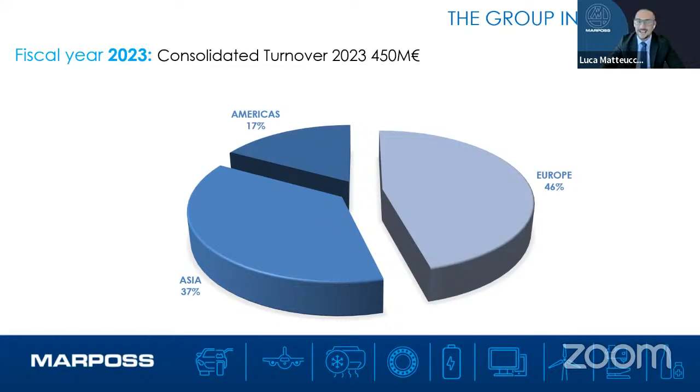Where we are based: our main sales and service centers are in Germany, China, USA, Japan, and Italy, while our main manufacturing plants are in Italy, China, Germany, US, and France. We are also moving forward to establish a small manufacturing facility here in India, due to the fact that India has become more and more relevant in the international manufacturing landscape, so we really need to move forward with this decision soon.

Which are the markets that we are more or less into? Apart from our stronghold coming from machine tool makers and gauge and fixture market, we are pushing forward especially into additional markets, coming away a little bit from the standard automotive industry. We've got aerospace, and here in India it's become a very interesting market, as we saw in the last panel discussion.

Biomedical, glass industry, where we saw there's quite a good market share in Europe, and we're expecting the same will become true also over India. Energy sector, because I think this is especially relevant in our country here, where the sun definitely is not missing, so a lot could be achieved in energy that could come from fuel cell and other sources of energy.

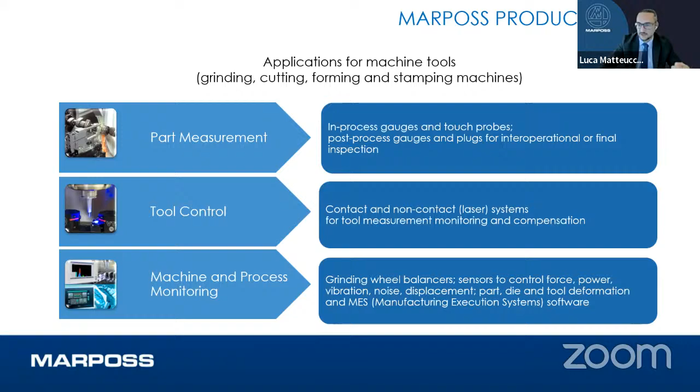Then, obviously, when we analyze the part related to inside the machine, we also offer the post-process, or the after-machining process section, where we could have inline gauging, offline gauging for some sample testing, inspection, testing with non-destructive test, leak test, and functional testing of, for example, batteries and motors. We also reach the point where we are able to provide completely automatic assembly solutions integrated inside the line of our customer.

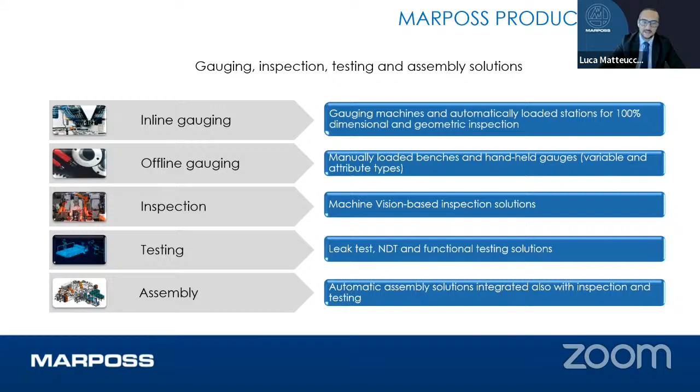How are we able to do this? We are able to do this thanks to our own technology, based on our gauging probes, our software, along with our industrial computer. The software collects all this information to give you the quality indication about how your process is going and what you have to do in order to correct it and maintain the current level.

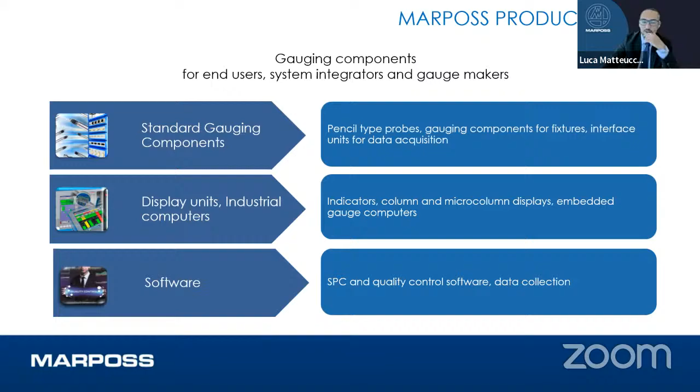Interesting technology that we're able to offer are also, as you say, contact gauging, but not only the electronic one, also air to electronic and also hard gauging. So it's very simple, but still very effective way to measure.

Non-contact gauge is a very interesting solution because it doesn't create any potential damage to any part, and also is very flexible. So in terms of avoiding overproduction and having an application that is able to measure various parts, we also move forward with this technology. Vision system, if you want to say, is more or less related to the above one, but in a different way.

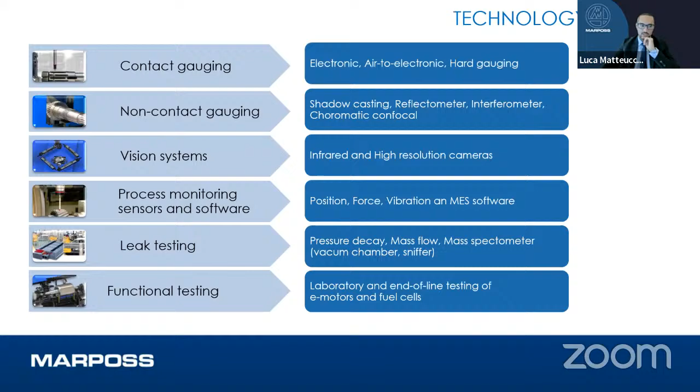As we said before, process monitoring, sensor and software, again, to check the entire environment for the machine, the leak testing and functionality test.

Having said that, what at the moment is our range? Our range is coming from, as you can see from this slide, 50% around machine tool products. Machine tool products means all the ecosystem related to the machining of the part. Following that, the other big chunk is inspection and testing, around 37%, and the remaining part, which we just saw in the previous slide, is the gauging component.

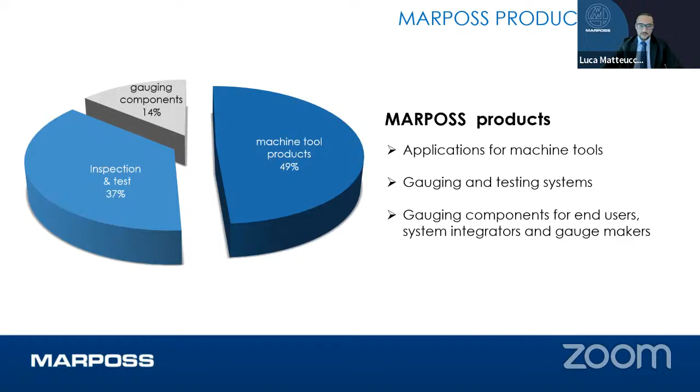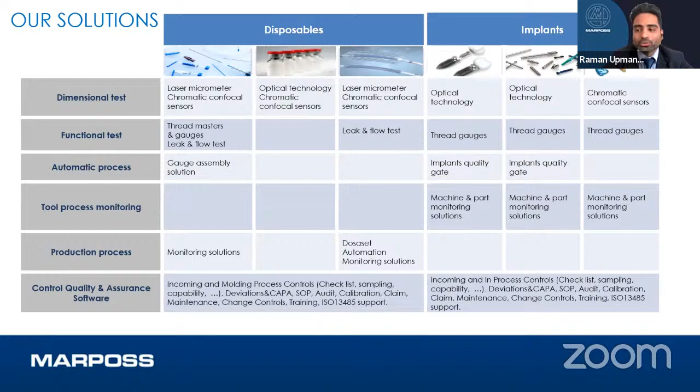For tool monitoring, as Luca explained, before the tool wears out, we need to continuously monitor the health of the tool which we are using to make any of the implants. So for that, we can provide the sensors. For production process also, we can provide the automatic dispensing solution, which can dispense automatically, you can say, the cyclohexanone to bond something. Apart from that, we do have the Industry 4.0 software also to link all these. I'll move on to the implants now.

So for implants, the first solution which we have is the optical solution, that is the OptoFlash XS. It does the complete measurement of the orthopedic screws and even the dental implants. It can measure threads, pitch diameter, size, profile angle, thread total length, linearity, and concentricity. It will recreate the 3D of the complete system, and this is based on the shadow casting process. Then you can have any of the measurements by the use of our software, and the cameras use the shadow casting process.

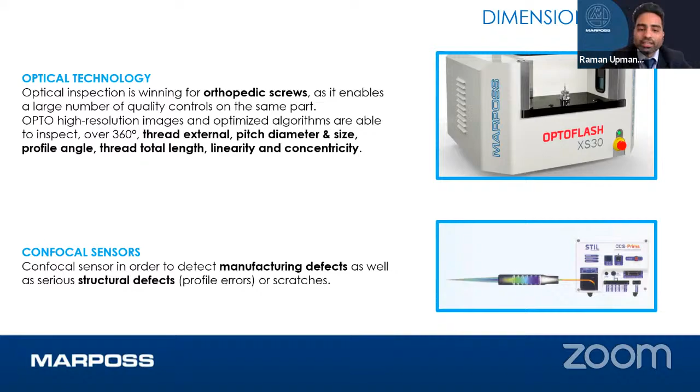Next one is the confocal sensors. Confocal sensors are again used to detect the manufacturing defects. They are basically based on the confocal technology, that is the white light technology. Once the white light is emitted from our sensor and gets reflected or refracted back from the surface, then from the wavelength at which it gets reflected, with that calculation we can find the structural defects and manufacturing defects of the implants.

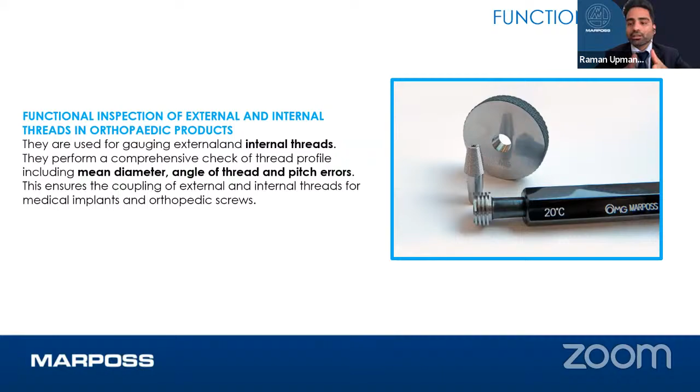Third one is functional and inspectional test of internal and external threads in orthopedic screws. These are the gauges which we provide to check the mean diameter, angle of the threads, and pitch errors. These gauges are not just a normal gauge. People will say, I can manufacture these gauges over here. Marposs provides the gauges with ISO certification, which is a must in the medical segment, because whatever dimension you are checking will ultimately go inside the human body. So 0.1, 0.2 mm here and there can make a lot of impact. So we provide these gauges to check the dimensions, and go/no-go gauges that are ISO certified.

Next, we also provide the implant quality gates. Like I explained in my previous slides, Marposs can provide the dimensional measurement of screws. Apart from that, we can also provide the functional testing of the screws and nails for implantology.

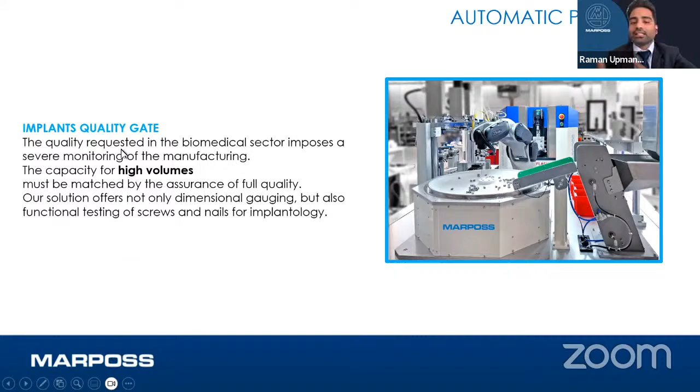This is for the tool process monitoring. Whenever we are making some screws, we are making them through some machining operations. So we can put some of the sensors inside the machine to check the continuous health of the tool, and it can even provide you real-time tool breakage, tool wear, and tool missing detection through these sensors.

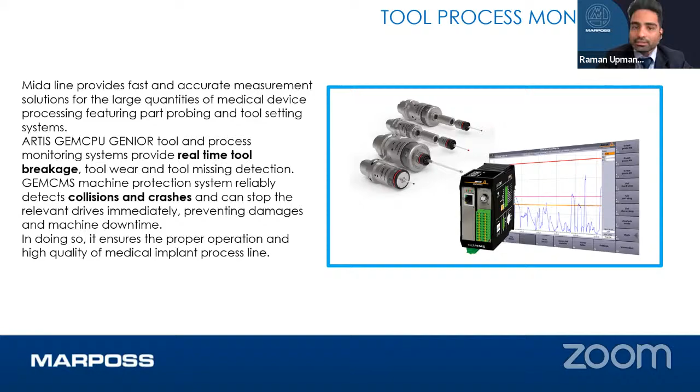Next one is the latest solution which Marposs introduced in its pocket, the 3D profilometer. These are again based on the confocal point sensors, but this can reconstruct the 3D image of the dental implants, and you can check any of the measurements, basically surface topography, through this.

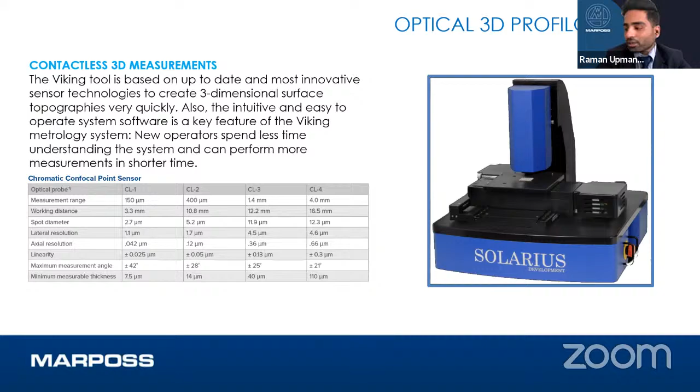Next, I'll move to the disposables. So the first sensor solution for disposables is again the chromatic confocal sensor, which is again used to check the thickness of any of the tubes or the glass products.

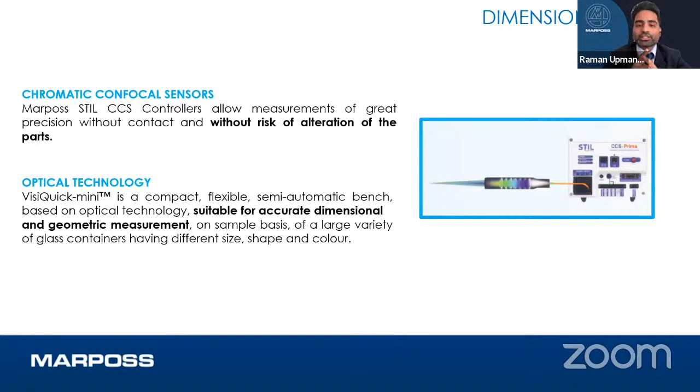Next one is the optical technology. So as Luca explained, we are into the glass segment also. So for the glass segment, if you want to check the vials, in the medical segment vials are being manufactured through glass. So if you want to have the measurement of vials, like the neck diameter or the pitch of the neck, or the length, point to point distances, anything you want to measure dimensionally, we can provide through our optical technology.

Next one is for, you might all have seen the blood tubings. So blood tubings are being produced by the extrusion process. So we can provide you the diameter gauge that is totally contactless, through which you can continuously measure the diameter and ovality of the parts once the parts are being extruded from the extrusion machine.

Apart from the real-time measurement of the diameter, we can provide you the out of tolerance alarms and regulation also for the extrusion process. So we can provide the feedback to the PLC to correct if the diameter is going out of the spec.

The second solution is again the laser-based solution, but that is the portable solution. This is what we call a handy wire scanner. So if someone wants to check the diameter offline or inline of any medical tube, they can have this laser technology and check.

So I would like to draw the attention of all the viewers over here that, as I told you, Marposs is very well known for precision. So we provide repeatability up to 1 micron, which is highly precise for non-contact gauging.

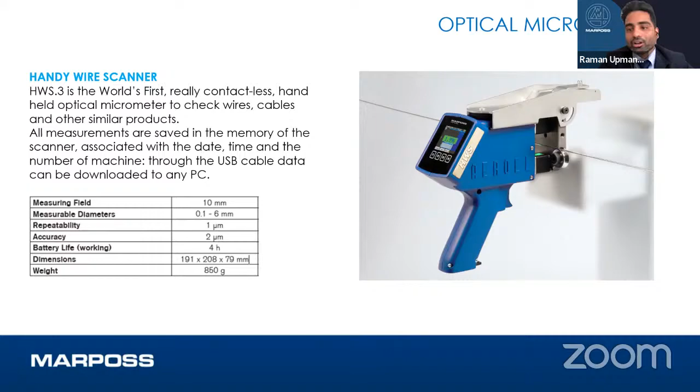Next one, again, as I explained for the implants also, we can provide the ISO certified gauges to check the thread connectors, as per the ISO standards, ISO 80369 and ISO 13485. So these are all already ISO certified gauges.

Again, the final solution which I would like to introduce is leak testing. So in the medical segment, leak test is very important. Suppose you are manufacturing any blood tubes, any blood bags, urine bags, anything. If you do not do the leak testing, you cannot pass your product and send it to the market.

So Marposs can provide you the complete leakage testing solution, that is for air leakage testing. Apart from the leakage, we can also provide the flow test with a single system only. So you can have the flow testing also, to measure the flow and leakage in one go.

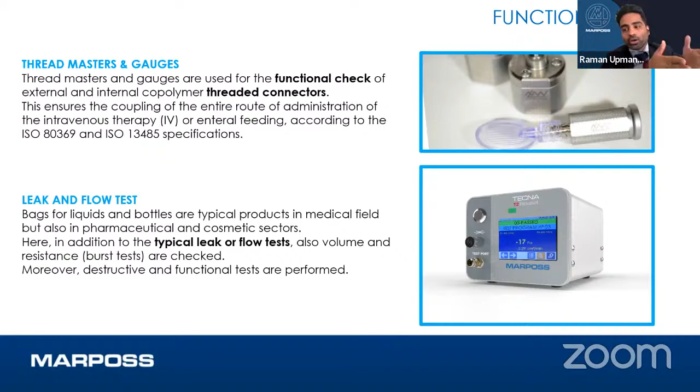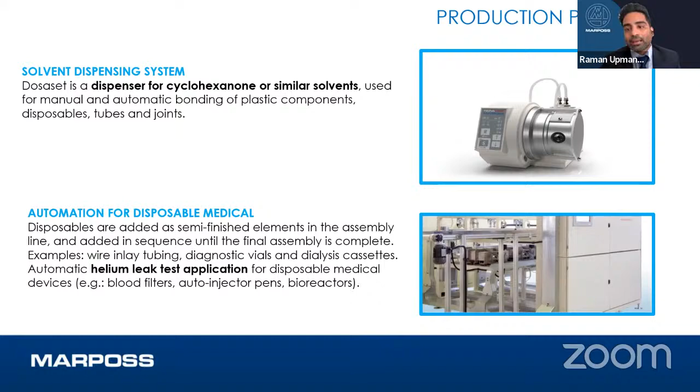And apart from that, if someone wants to have very precise leakage detection, which cannot be done through air, because air has the limitation to detect leakage up to 10 to the power minus 3 millibar liter per second, we can also provide the helium leak test application, which, for example, can be used in blood filters, auto injector pens, and bioreactors.

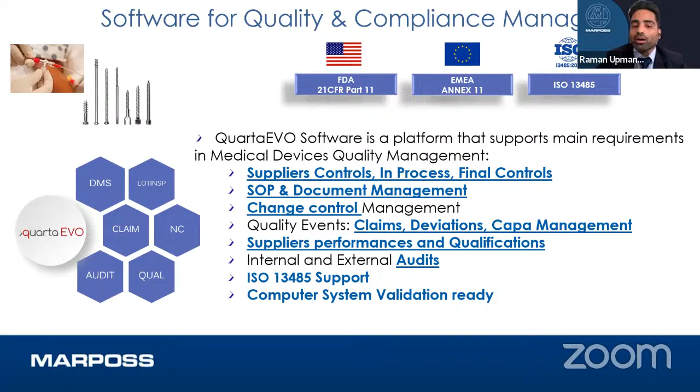Apart from that, as I explained, we can provide you the software for quality and compliance management, that is the Industry 4.0 software, which can be supported by ISO standards like 13485. So that will be all from my side.

Thank you so much. Thank you, Raman, for taking us through your slides. I feel healthcare and medical systems, biomedical, is very important. And like you said, one life lost is far too many. I guess manufacturers in the biomedical industry who want to improve quality, leak testing and other things must look at these products. Thanks, Raman. And now let's move to Hanish.

Thank you, Dineshji. Thank you, Luca, for this opportunity. I will speak about our offerings in the semiconductor industry. As an introduction, I started in Marposs in 2004, coming from college as a service engineer. Then I moved to sales, then served as regional head for North, moving to strategic business. Now I am currently key accounts manager head, as well as industry manager for semiconductor and 3C. So I'll focus on the semiconductor offerings today.

So what does Marposs offer? Marposs is providing sensors for process control during and after the machining process. I'll just skip through this slide. Luca has already covered what we do, the sectors we are into, and the numbers for the group.

So machines for chip manufacturing. So here we are trying to show the key machining process and the equipments in the chip manufacturing, starting from ingot grinding to packaging and die attach. What Marposs do? So Marposs sensors can be integrated inside an automatic machine to keep under control some parameters that are essential to keep the production quality under control and reach a constant productivity. So the keywords here are production quality and constant productivity.

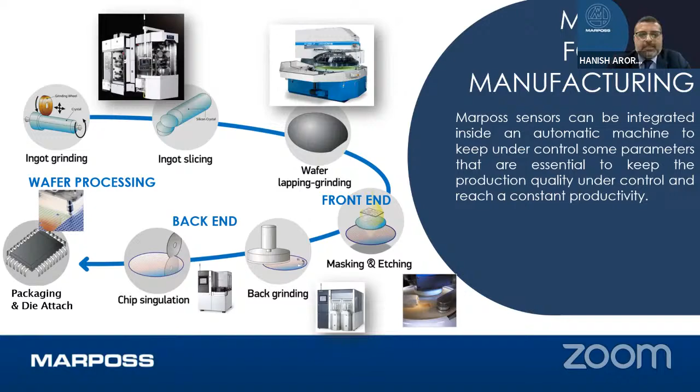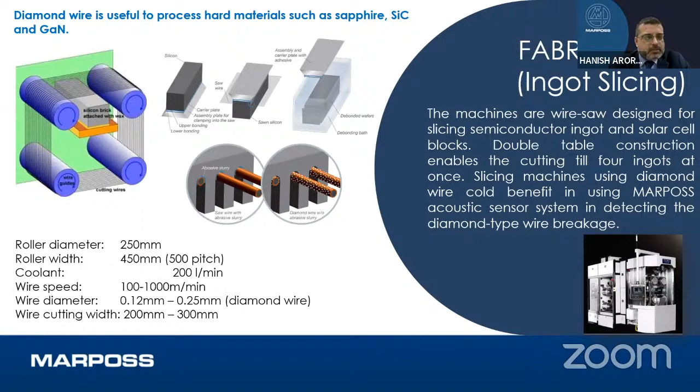So we have to cut these ingots into number of wafers. So out of an ingot of 2 meters in length, we are cutting a wafer with 1 thickness. So we are getting 2000 wafers from an ingot of 2 meters length. And we are using wire with diamond coating. For solar, there are square ingots. For semiconductor, there are round ingots. So slicing machine is using diamond wire that could benefit in using acoustic sensor system in detecting wire breakage. So the wire is around 200 micron in diameter. The diamond may chip off and the wire may break.

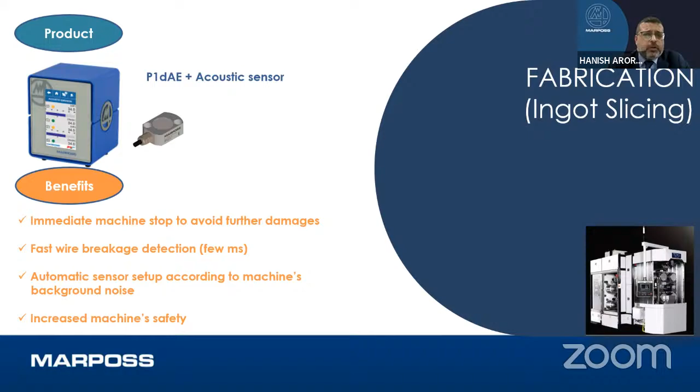So we are basically offering an acoustic sensor with a P1dAE amplifier, which is able to detect the wire breakage. So we have a P1dAE plus acoustic sensor. The benefits are immediate machine stop to avoid further damages, fast wire breakage detection, that is in few milliseconds, and automatic sensor setup according to machine background noise and increase machine safety. So this solution goes on the ingot to detect the wire breakage.

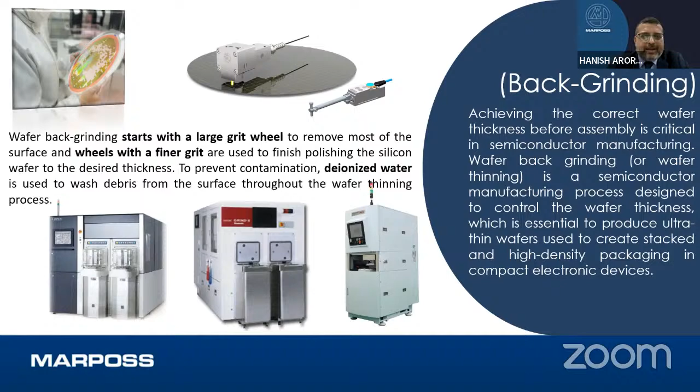Coming to the back grinding, so achieving the correct wafer thickness before assembly is critical in semiconductor manufacturing. Wafer back grinding is a semiconductor manufacturing process designed to control the wafer thickness, which is essential to produce ultra-thin wafers used to create stacked and high-density packaging. So, as we understand, the wafer has to be thin because already the chips are there. So an 800 micron wafer has to be thinned down to 100, 150 micron, depending on the application. So there is a huge grinding wheel, and DI water or ultra pure water is used as a coolant. What is our offering?

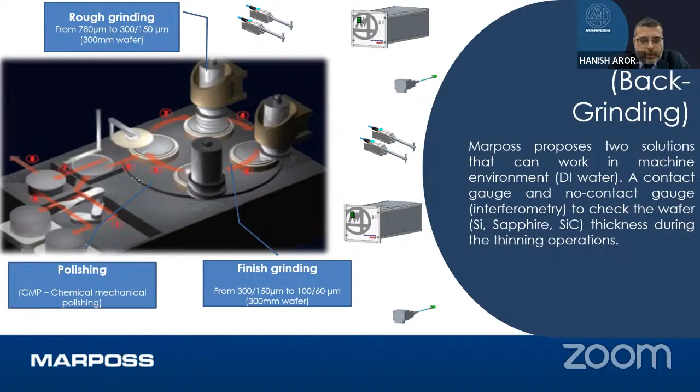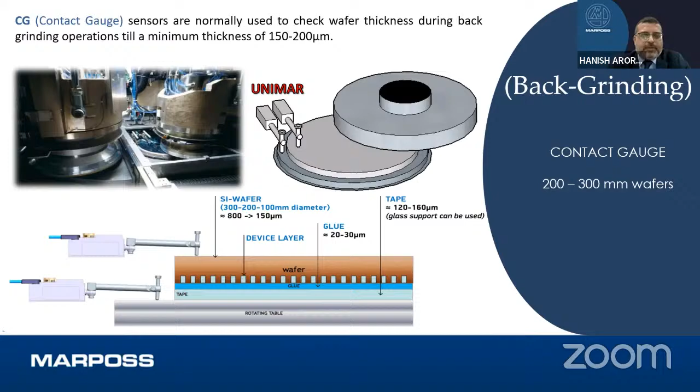So Marposs proposes two solutions that can work in machine environment. We can offer a contact gauge or a non-contact gauge, depending on the application, depending on the material during the grinding process. So we are basically checking the thickness during the grinding process. The first offering is contact gauge that are normally used to check wafer thickness during back grinding operation till the minimum thickness of 150 to 200 micron. So in case of silicon material, we can use a contact gauge. But there are wafers that cannot be measured with contact or infrared. So there are hard materials like highly doped wafers, gallium nitride, silicon carbide in some cases, and gallium arsenide. So we have a different solution for that.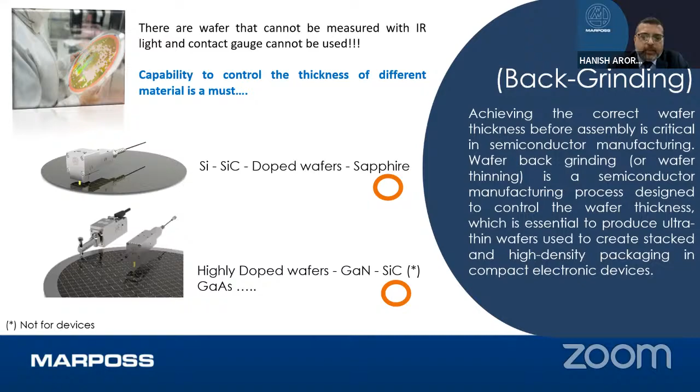We are offering flexible configuration in using multiple type of sensors, capability to control the grinding of different type of wafers, and to produce a stable measure. So as we understand that wafer chip manufacturing is a complex process and is using different type of materials. So we have designed different sensors and amplifiers looking at the industry requirement. So in case of silicon, we have a contact gauge. In case of silicon carbide, where it is transparent to infrared, there is interferometry that is using IR gauge. Then we have confocal, where we can use it with a distance gauge. Then there is a contact gauge where we use the IR gauge, and different Marposs sensors for the machine monitoring.

Here, I would like to emphasize that Marposs controller is acting as a black box. So there is a log file, which is basically checking what parameter has changed, if there is any issue. So if there is a problem on the machine side or on the measurement side, we are having a log file which is able to trace where the problem stands.

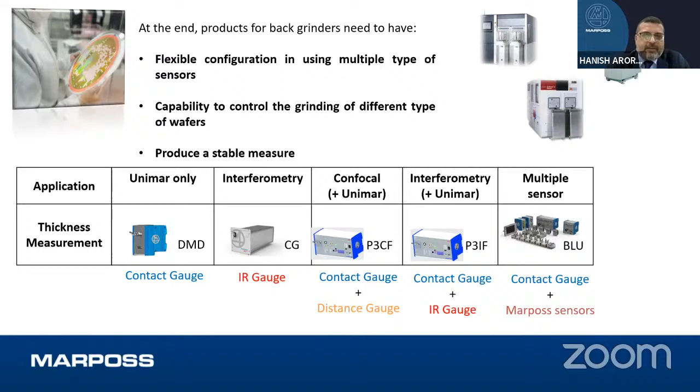Coming to the NCG: a silicon wafer can be thinned to less than 150 to 200 microns, and there we can use a contact gauge. But where we need a thickness of less than 100 microns, we use an NCG, a non-contact gauge that basically works on infrared. In case of silicon and silicon carbide, where the material is transparent to infrared, we can use an NCG to control the wafer grinding process, and we can measure thickness down to around 4 microns.

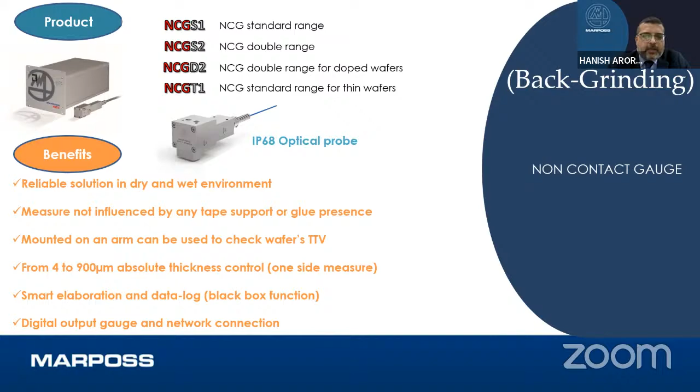It comes in different configurations, so depending on the material and application, we have various sorts of NCG. It's a reliable solution in dry and wet environments. The measurement is not influenced by any tape, support, or glue presence. Mounted on an arm, it can be used to check the wafer's TTV. We can check thickness coming down from 900 microns to 4 microns, with smart elaboration and digital output.

Very recently, we have developed a new gauge that we call P3CF. This has been developed for hard materials, where we have highly doped wafers, ceramic plates, and germanium that are not transparent to infrared. In that case, we use confocal technology. There is one contact gauge on the rotating table, and the other confocal gauge on the wafer, so it's not destroying the wafer while doing the wafer thickness measurement. This is mainly used for hard materials.

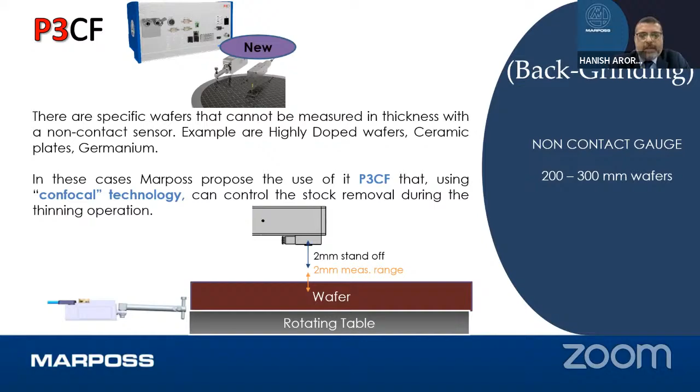Coming to the next process, that is dicing. Initially there was an ingot, then there was a wafer. The wafer already had chips on it. We had to grind it from 800 microns to 150 microns, depending on the application, during back grinding. Now there is dicing: chips are on a thin wafer after back grinding, and now we have to cut the chips, which will later be packaged. A dicing saw is used to basically cut the chips from the wafers. Semiconductor wafers can be of different materials, could be glass, ceramic, crystal, and others.

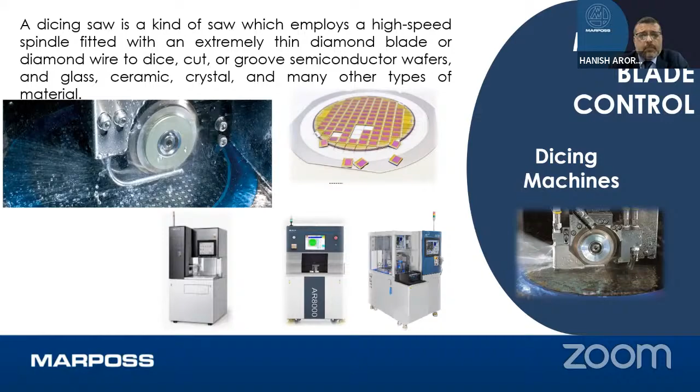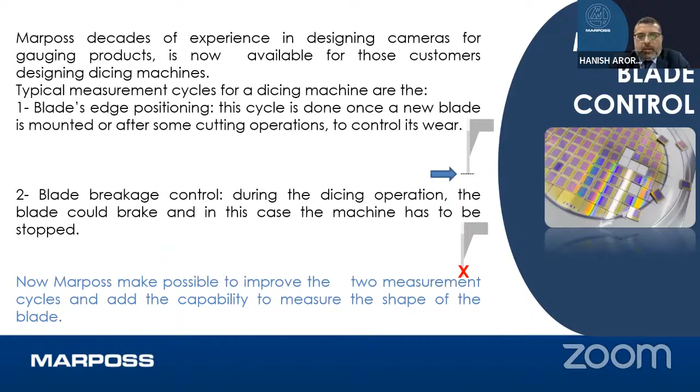Using Marposs's experience in camera technology and machine solutions, we have developed a laser diode that checks the blade's edge positioning. This cycle is done to control the blade's wear. We also have another sensor doing blade breakage control. We use the MDG1 controller, where there are two sensors: one for positioning to control blade wear, and the other for blade breakage. The blade is quite fragile, around 30 microns in thickness, so we need some mechanism to understand if there is wear or breakage.

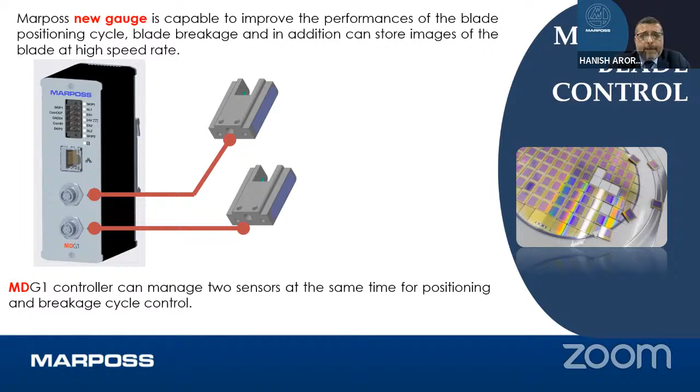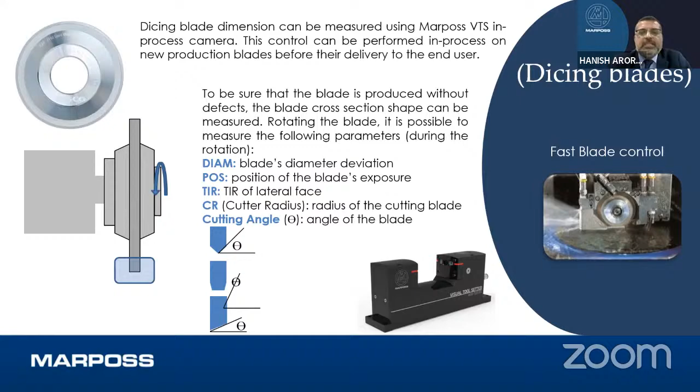Additionally, we have a camera-based system. The dicing blade dimension can be measured using Marposs's VTS in-process camera, a visual tool setter that can check the dimensions of the blade. We can check the blade's diameter, its position, the TIR, the cutting radius, and cutting angle. We take a picture of the blade with a camera and are able to measure these parameters. This is how it looks, and if required, we have to change the blade.

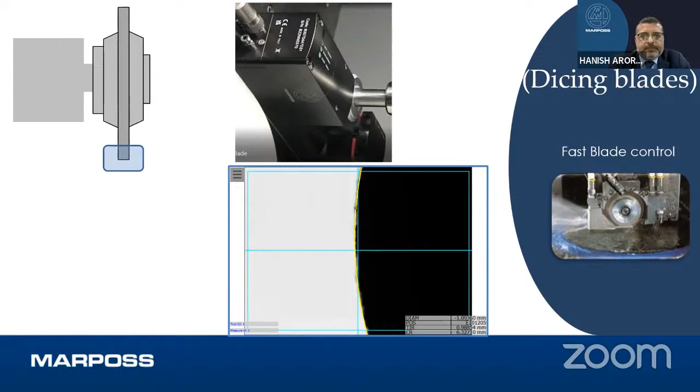So I spoke about our sensors used during the machining process. Now comes the second part, the sensors used after the machining process, mainly for metrology and inspection. Marposs can offer a wide range of sensors: a single point chromatic confocal sensor, a line sensor, a camera, white light interferometry, or an infrared sensor. Semiconductor manufacturing is a complex process, and we may need metrology at various levels of the process. So we offer different sensors for inspection, thickness, TTV, bow, warp, and 3D topography.

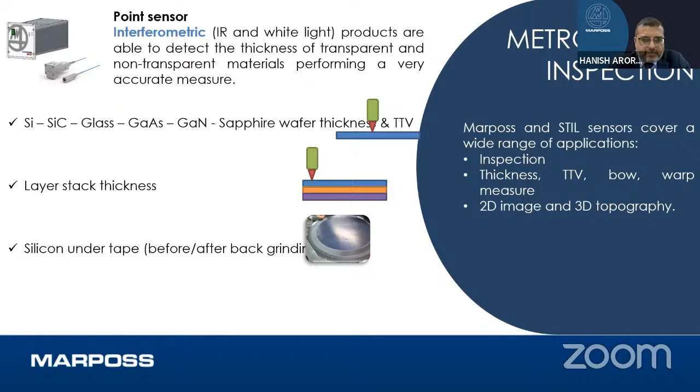Point sensors basically work on IR and white light, and they are able to detect the thickness of transparent and non-transparent materials, ranging from silicon to gallium arsenide, gallium nitride, sapphire, etc. Confocal technology is the optimized solution to produce different types of high accuracy measurements. We are able to check transparent layer thickness, TTV (total thickness variation), critical dimension, TSV, micro topography, flatness, roughness, waviness, step height, stress, wafer thickness, and TTV. So all sorts of measurements required, we are able to do.

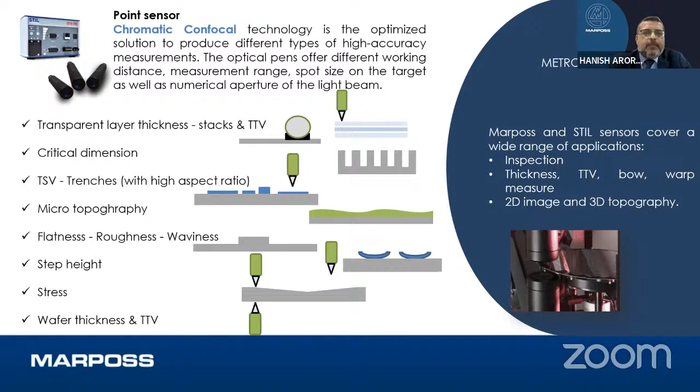In the semicon industry, ball grid arrays are indispensable for first or second level interconnect, connecting two chips together. The arrays are tested for planarity and diameter uniformity using a point sensor offered by our group company, which is from France.

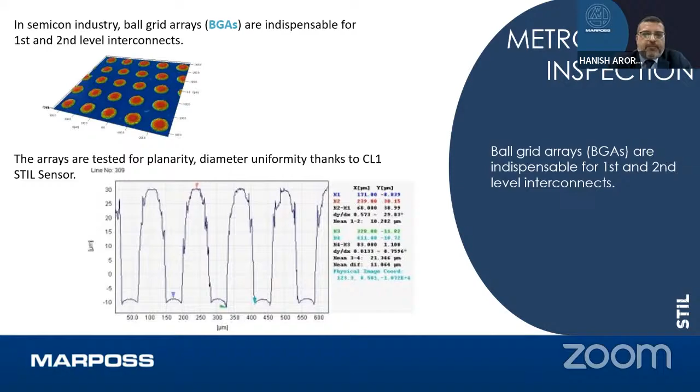Besides, we can do topography and PCB defect measurement. On the defect side, we can take a picture of the sample and perform different types of measurements, such as checking for a scratch, a dent, or other cosmetic measurement requirements.

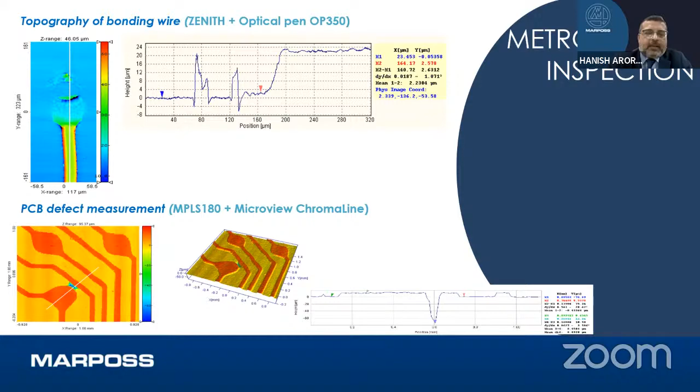These are wafers. Wafer roughness inspection is frequently performed to check the wafer surface after the machining step. Wherever we require roughness, flatness, or waviness measurements, we are able to measure that. We can take a snapshot of the profile and check the wafer roughness in microns.

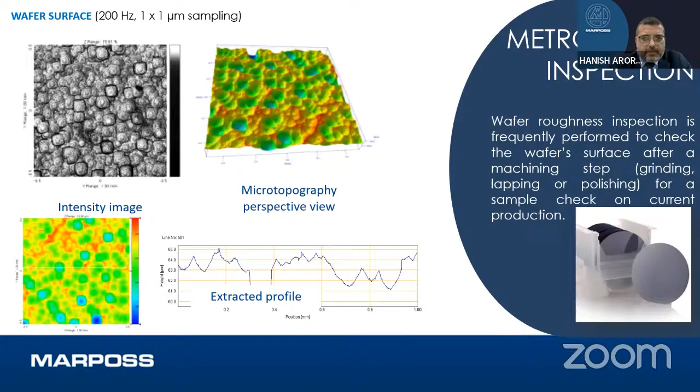We are also doing wafer edge inspection. This is critical to drive root cause analysis for improving yield and preventing possible cracks on the edge from propagating into the wafer and damaging the chip. If there is a crack on the wafer edge, it can damage the complete wafer, so we have a camera-based sensor that can be used to check the wafer edge.

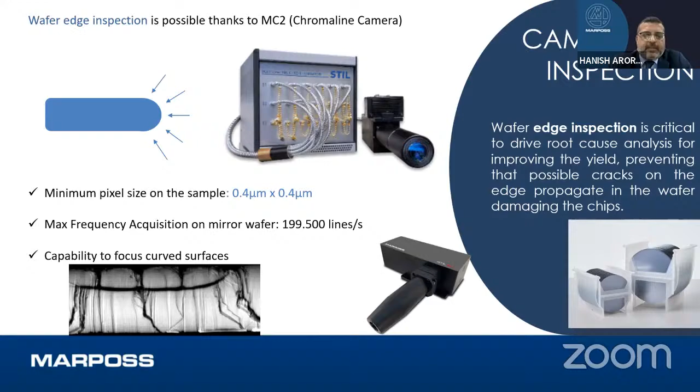PCB can be inspected with the camera itself.

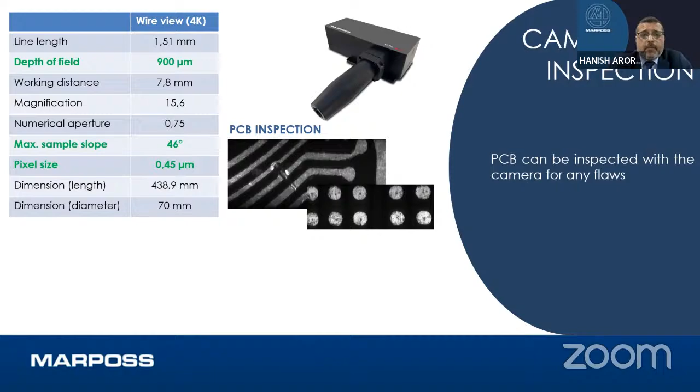Very recently, Marposs made another acquisition, Solarius, a company from the US that offers 3D non-contact profilers capable of 2D and 3D geometry and dimensional measurement like angle, radius, step height, and distance.

We can do defect analysis at the macro level, and we can also do reference measurement.

That's all from my end for the offerings to the semiconductor industry.

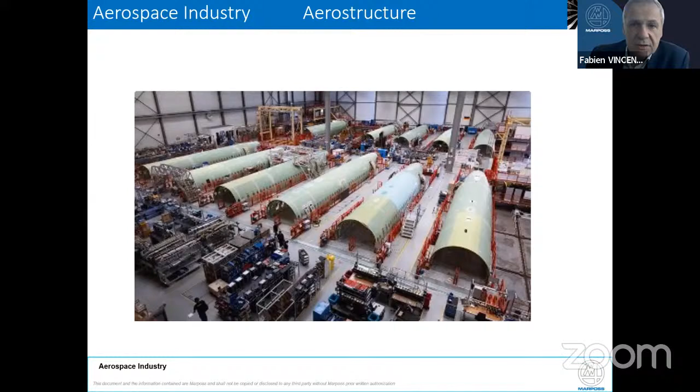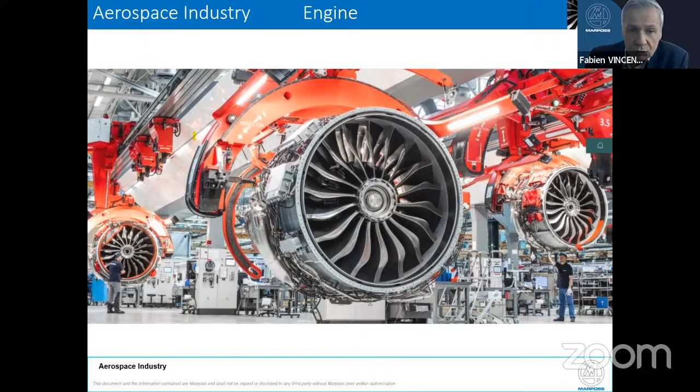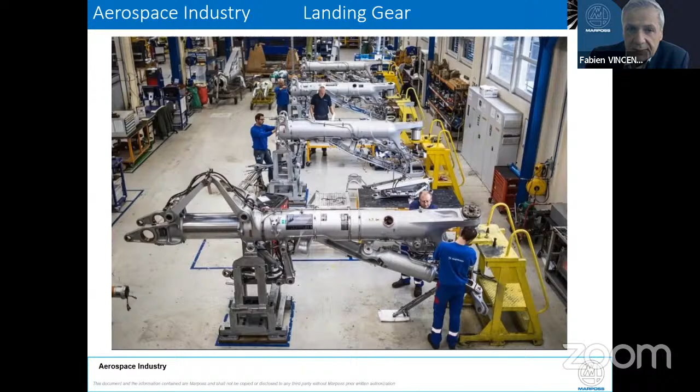We are very close to engine manufacturers—these are OEMs, large makers, of which there are really only four major ones. We also work with customers manufacturing landing gears, which are complex, sturdy machine systems where we offer our technologies across various topics, as well as all related equipment for gearboxes and transmissions.

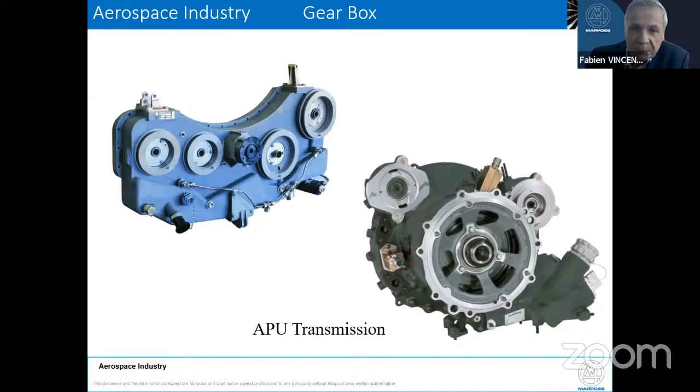Here we have big mechanics as well as fine assemblies where our customers use our equipment. And lately, with the move toward electrification of airplanes, we see more and more actuators and motors inside planes. Here we use our systems for controlling these motors and eventually checking batteries, which are part of the complete assemblies of aircraft—elements of safety as well as elements of vital need.

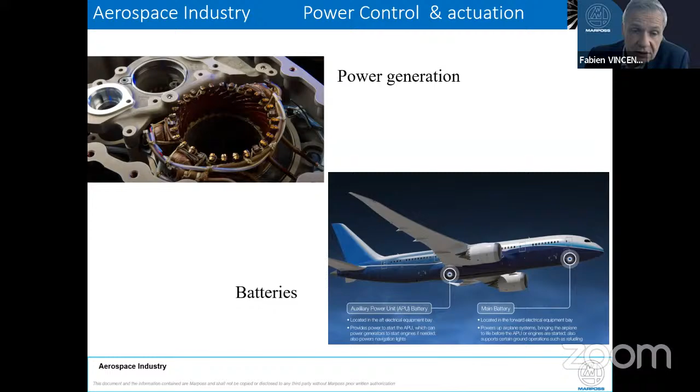So what we do here is give a rough view of all the technologies that we're able to use for dimensional inspection.

We can see that some of those components used in aerostructure will require our equipment for dimensional inspection, for process and tooling monitoring. We have mapped all of the necessary components in the aerostructures that will require, in a more detailed way, technology which has been partially already presented here. So we have done this mapping.

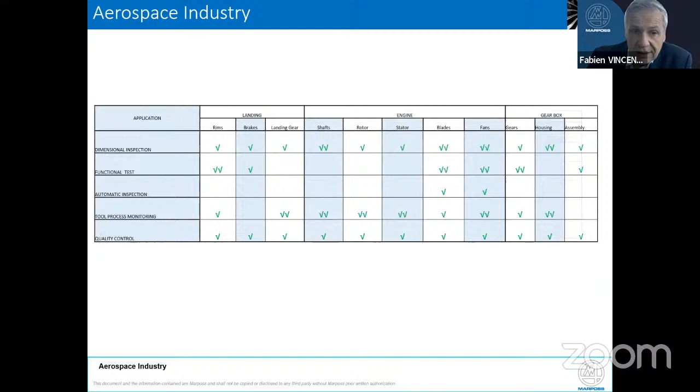You can see even for batteries and e-motors, there are lots of functional tests currently made with our systems to check the motors in the airplane. Likewise, when we speak about landing gears, we see that there are landing gears and related items like rims and brakes. There are lots of elements in process monitoring as well as functional tests which are needed, where we supply our technology.

As far as the engine is concerned, we have intensive manufacturing processes where many components are vital to the engine, rotating components. An engine is a very complex system which requires checking in detail all of the elements, including functional tests as well as dimensional testing and controlling. And of course, we are using along these processes all the process monitoring which has already been introduced to you.

Now we will enter into this. If you look at my table here, you can see that quality control is something which we have to do virtually always. And if you look at dimensional inspection, there is no other way to produce components for the aerospace industry. I have to do dimensional inspection.

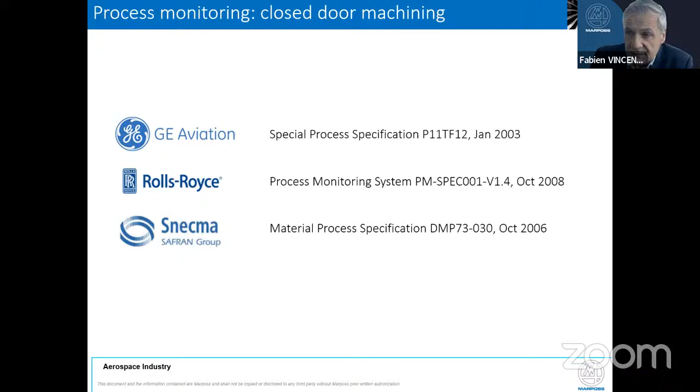In aerospace, there are specifications of manufacturing processes which we call closed-door machining. Closed-door machining means that we cannot manufacture parts without monitoring the system, or we cannot open the doors to see what's going on inside the machine. This requires monitoring systems, probing systems, and systems that will make sure that what you manufacture inside the machine is done properly.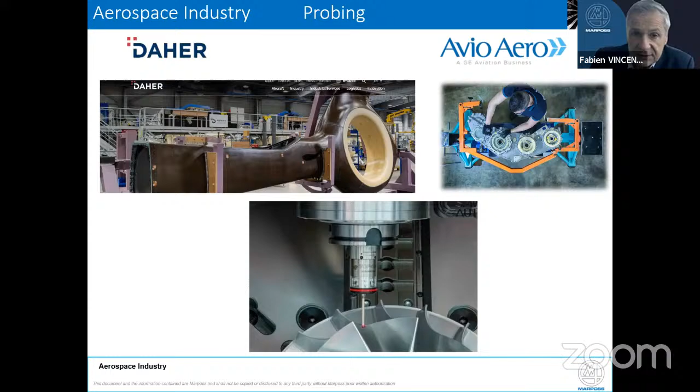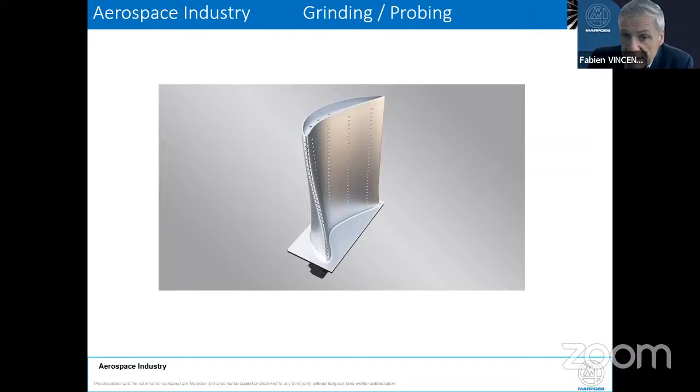So here we have an example of probing for components like gearboxes, complete sub-assemblies for helicopters, where our customers are currently using probing systems inside machines. Components like grinding the blades or the compressor blades require as well probing and grinding and monitoring devices to make sure that the grinding process is done properly.

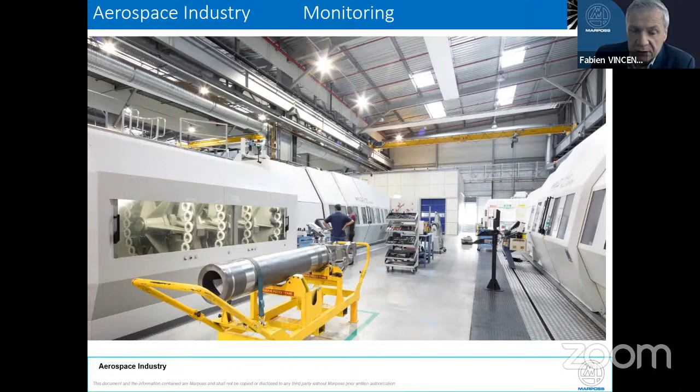This is a shop located at one of our customer OEM's manufacturing landing gear. You can see the landing gear here on the yellow cart, which is brought into the machine. These machines are running 24 hours, 7 days a week. They are fully door-closed machining processes, meaning there is no one opening the door to see what's going to happen. That requires, of course, a monitoring device.

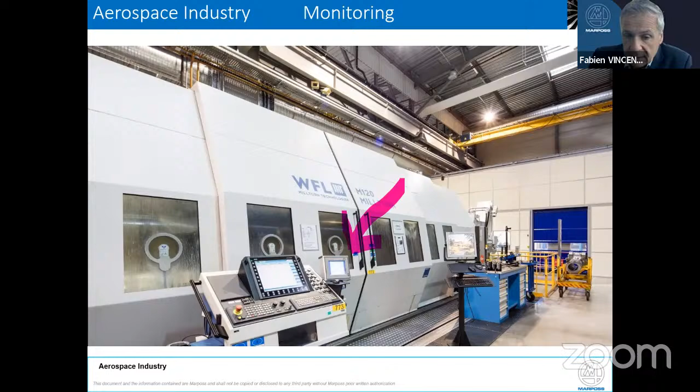You can see here one of our monitoring systems from Artis, which is driving and making sure that all the processes are made in compliance with what is requested. Just one single piece of information about this: monitoring requires sensors, all sorts of sensors which are located in the machine.

Okay, this is another kind of machine. As you can see here, the sensors are either torque or force sensors. We have power monitoring, coolant flow, acceleration, vibration, acoustic, and force gauges. All of these sensors will send data to our system, which will make sure that every single process is done within the normal range it should work in.

That's the way monitoring works, and that's the way you can keep on with closed-door machining with our system. Here as well, Rolls-Royce has selected our system for machining of blisks for engines, and they use Marposs systems in their machines.

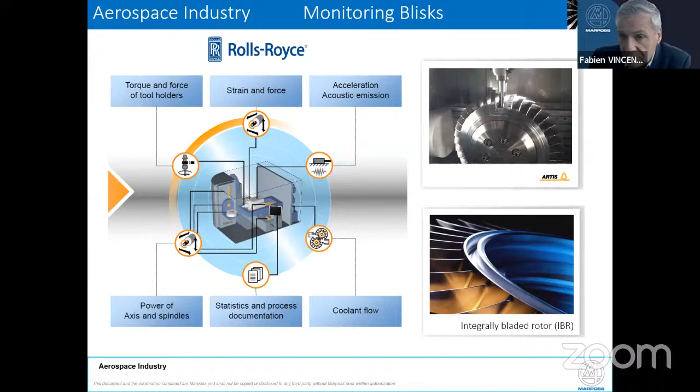Another important and very big volume of components in aerospace, going back to the aerostructure, are rivets and fasteners. They must be made and used massively, and they must be manufactured according to specifications. When you have mass production of rivets, the only way you can make sure those fasteners are made properly is to use monitoring devices on the machines.

Here we offer systems from Brankamp. That's an example: some of our customers are using those to manufacture their fasteners for the aerospace industry and to guarantee the compliance of the production of their products.

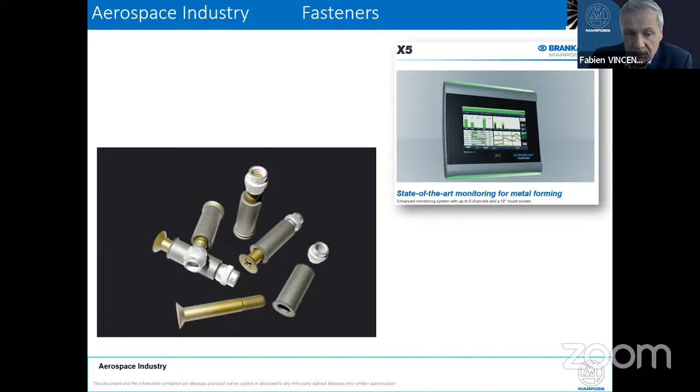Likewise, aerostructures — I spoke earlier about rivets and fasteners. They are drilling holes in the aerostructures to fix the elements together. Drilling holes is a delicate process, especially when you have bonded materials or multi-layered materials.

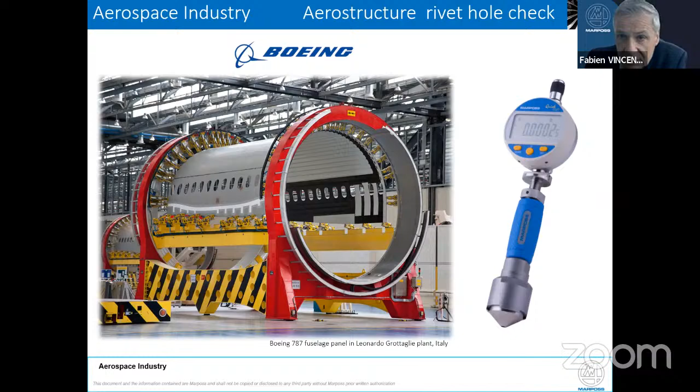You must make sure that this hole, the entry, I would say the angle of the hole, is correctly made. To do this, you need to check the countersinks, the chamfers, the depths of the hole, the diameters, because if the rivet is not properly fitted, it will generate, in the best case, some turbulence. In the worst case, it can crack the structure and put the whole aerostructure in danger. So we are offering a whole range of manual gauges, but the current trend is moving toward other solutions.

The trend in this industry is to go to robotized and automated drilling processes. Here we can equip and offer systems for this automated drilling, controlling that the bore is properly drilled, controlling that the chamfer is properly made, and feeding back to a central unit that keeps the data of every single hole. This is what the industry is going through, so we offer also those automated checking devices.

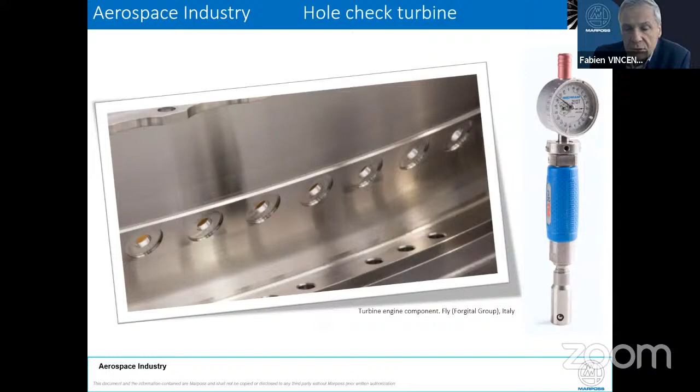And of course, a whole range of manual gauges: go/no-go gauges, thread gauges, spline gauges, all the components which are inside the engine, and of all the components which are machined for the aerostructures as well. So these are the solutions that we currently offer for customers.

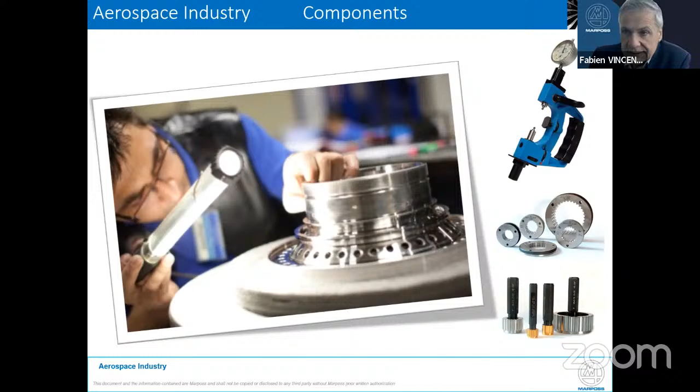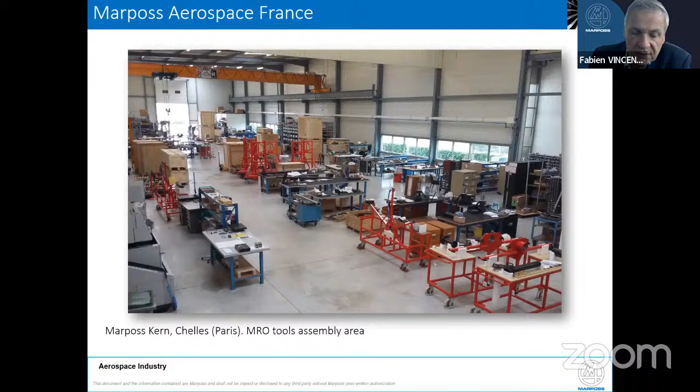I am going to speak about one more sector, the MRO, which is another activity we do. We manufacture toolings for the aerospace industry, designed to assemble or disassemble the elements of the engines. These are currently manufactured in France and Italy and exported worldwide. Examples include tooling designed to provide support in grinding the turbine blades for MRO purposes - maintenance, repair and overhaul.

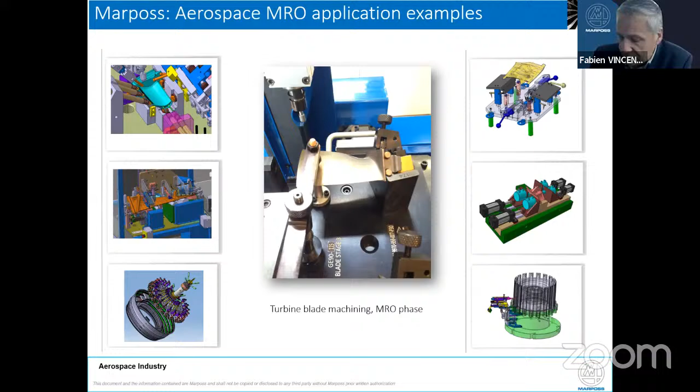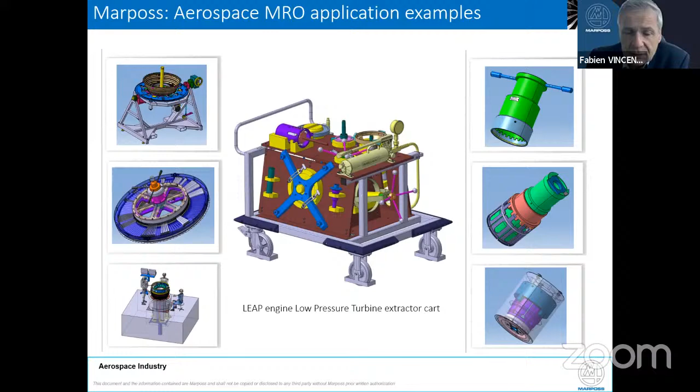We have all sorts of tools which are really dedicated, which we have designed purposely for that purpose, that we are manufacturing for that purpose. These are sold either through our OEMs, the engine manufacturers, or to distributors which actually cover the market for the MRO. Let's see - these are turbine extractors, keys, wrenches, all dedicated equipment that we currently manufacture for the aerospace industry.

Okay, that is what my presentation is about.

Thank you, Fabien, for your presentation, because aerospace is an industry which needs high precision and quality. And hearing from you, with the length of years you have worked with Marposs, it feels like a Marposs family. One award that comes to my mind is the Best Place to Work award - if it was in my power, I would have given Best Place to Work to Marposs. Looking at it from three years, I can say it's gone from toddler to a fully grown company, with people who have invested great chunks of their lives with the company. So I can understand how the culture Marposs has built from the corporate office has passed the same legacy to different countries. And I can see Hanish has been there for a very long time, and Raman is gearing up for another decade or so.

Quickly, I will take a couple of questions because I know it's a busy day for everyone. So Luca, you have spoken about quality, something you always stress - quality, and in the sense that a lot of countries are putting mandates that if somebody is exporting or bringing in products, it has to be a certain quality. So according to you, what role do quality checks play for the entire manufacturing industry, especially from an Indian as well as global perspective? Your views on quality checks.